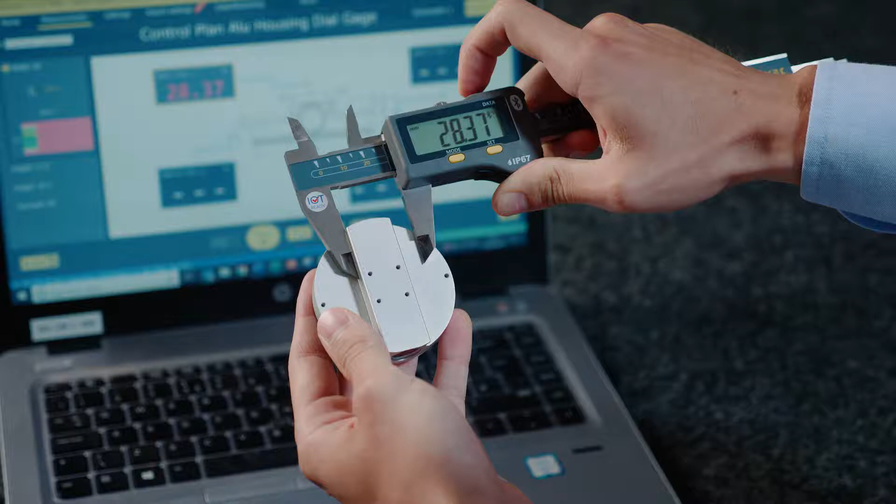Today we're going to be focusing on Sylcom Pro. What is Sylcom Pro? It's a software package that allows simultaneous communication between various devices, including Sylvac hand tools, the Bowers ball mic, Trimos height gauges, and plenty more.

Using the software package negates the need for manual data input. This enables an increase in efficiency and reduces potential human error. The Sylcom package also indicates to the operator very quickly if a component feature is in or out of tolerance. The values can be reported and saved within the software, or externally if you're using a separate SPC system. Let's take a closer look at the software.

Once you've started up the software, the first screen that appears is the login, and we can have various different levels of login. I've just got the supervisor here, but you could have the name of the operator, which would appear on the report. Down at the bottom here, I've got a little green indicator telling me that some of the instruments are already connected, because of some of the settings I've already applied. I'm just going to put in the login. It's worth mentioning that with the login there'd be different levels of access to changing settings, dependent on who's using the system, and these can all be fine-tuned.

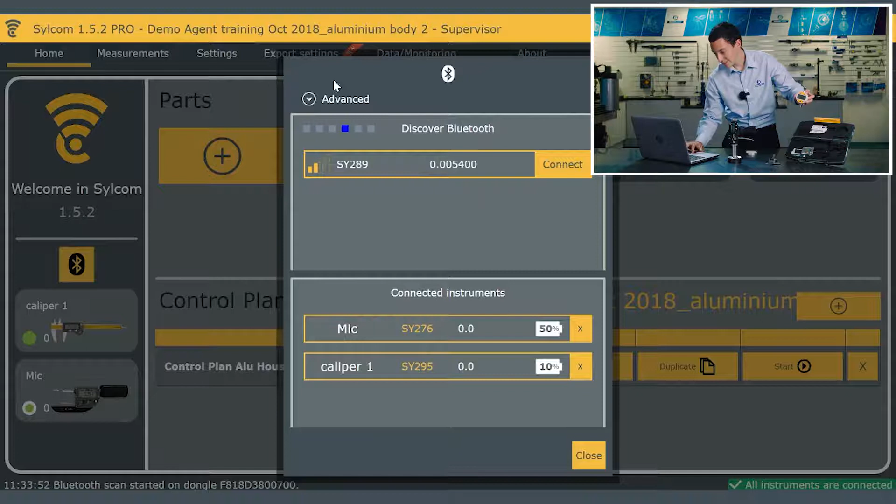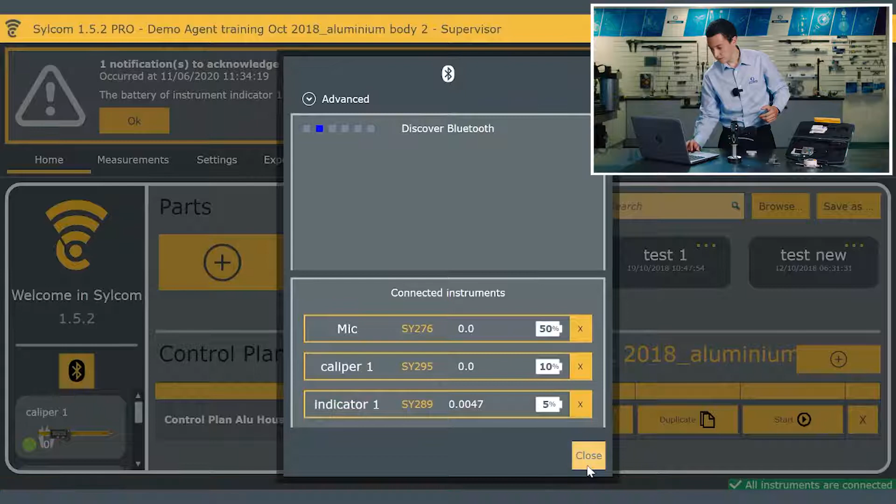We can connect up to eight instruments using the Bluetooth dongle, but if I had requirements to connect more, that's not a problem. We can add another Bluetooth dongle, and connect a total of 120 instruments if required. Now that that's connected, we can see an indicator at the top telling me I need to change the batteries on this. That's another feature of the software - it'll also indicate if the calibration date's running out, and I can get warnings and alerts linked to that.

So we've got a range of hand tools connected there. On the main screen we have some parts - you see I've been doing some tests, but you'd have a different part there, and the operator will be able to select and link to that part. Depending on where you are within the process, you may have a number of control plans. I've got a control plan here for the aluminium housing,

which is actually just the back of the indicator, you can see here. Just to keep things simple, I'm going to be using the caliper, but in reality I could be using a height gauge, an indicator, or the ball mic - it's not a problem connecting different instruments.

So if we just click start, I can pick up the caliper. I've got the component here. The first thing to point out is the part serial number. I can put in a part serial number, which will obviously be unique to the component, or if I don't fill that in, I can leave it, and that field will automatically be populated with the date and time.

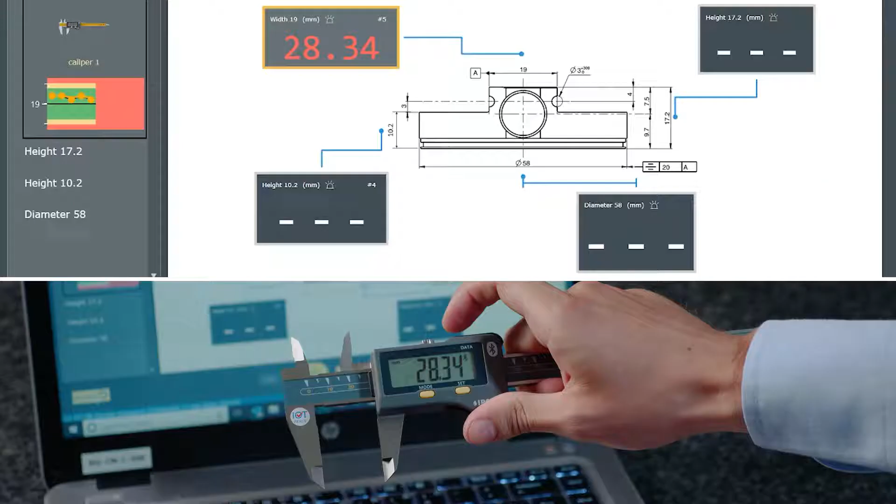We can see that the measurement we want to take is the width at 19mm, but it's also telling me what instrument to use. So if I did have various instruments, a picture would appear there, just helping the operator out. We've got a live view of the result changing as I'm measuring, so I'm just going to go and take that measurement. We can see as I've clicked the trigger, the screen has gone green - we're in tolerance and that value has been stored.

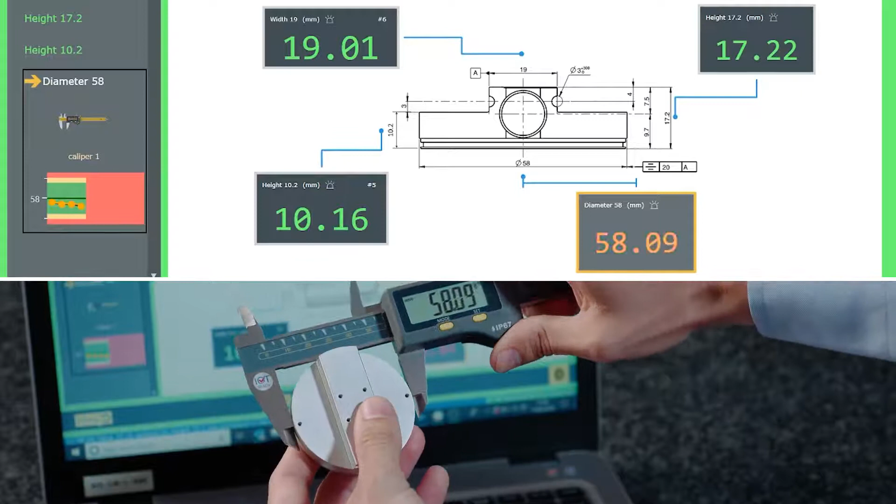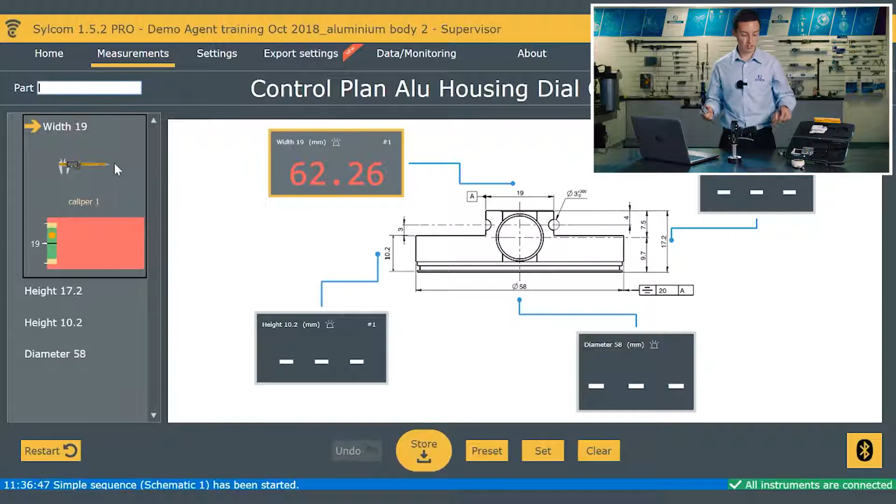And just work my way around now. So we've measured that component. Automatically the screen can detect that and has restarted the program for that. So I may pick up another component now, I can put in the unique serial number again and then work my way through this.

But you can see that now we've gone through one flow of results, on the screen there, just under the caliper, we've got an actual review of the data. That's going to tell me, and it will continue to populate as we go through, so that can give the operator an idea of trends in relation to a tolerance band.

So I'm just going to quickly take a few more so we've got a bit of data to work with. And 58. Yeah. So we've got some information there.

And I'm just going to put in a wrong result now, just to show you what happens. You can see the trends there appearing by the control limits. But if I put in a wrong result now, you can see the screen's gone red. This whole screen would go red actually if it was the second or third result and the other two were okay, so it's giving me an immediate indicator that something's not right there.

If I wanted to go back and undo, because I may have accidentally clicked the button, I can just click undo there and remove the previous result, and then we can start again. I can also restart measuring that component if I picked up the wrong one or something like that.

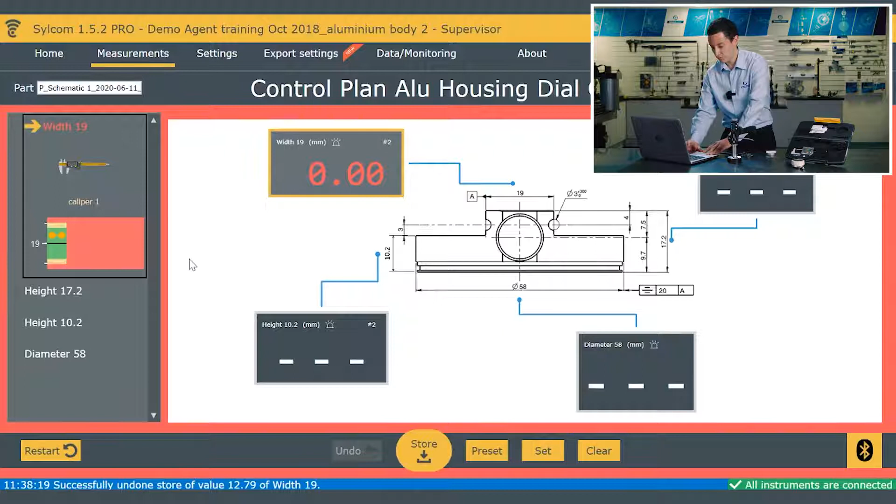So in terms of actually creating a program and a control plan, I'm just going to show you briefly how easy that is before we then move on to the results.

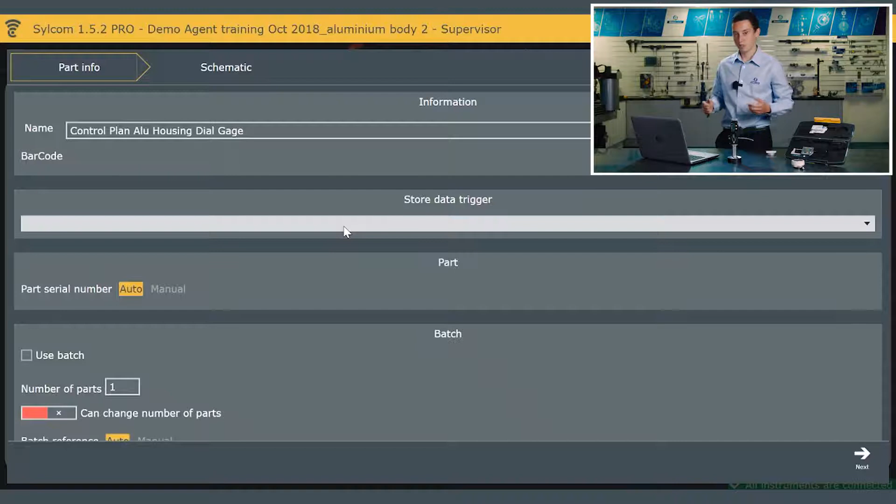So if I go into edit, we've named it, I've got a name there for it. Store data trigger is irrelevant. I've got the trigger on the top here, but I can actually have a foot pedal, Bluetooth foot pedal, or a key on the keyboard to signify that.

We can change the batch number, which I've just left as automatic. So depending on the number of parts you're doing within a batch, you could ask the program to actually stop.

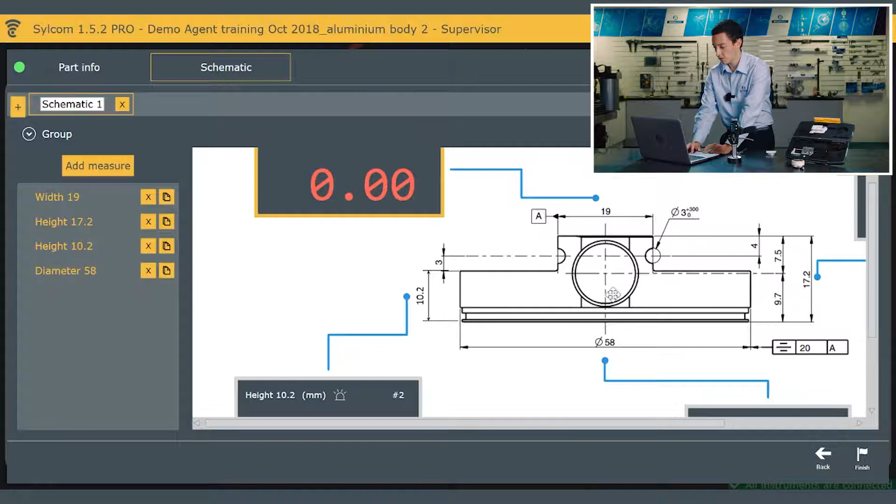And then within the actual control plan, all I've done is input a PDF of the technical drawing with some of the measurements I wanted to take a closer look at, and I can literally move that around very easily like that. I've added the measurements in.

I can fine-tune exactly where I want to place these, and then we can also very easily just change the size of the results and readings just like that.

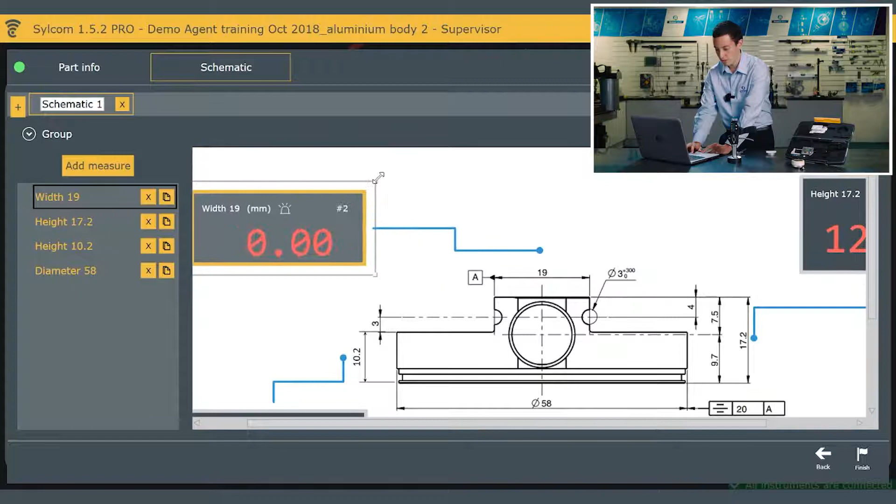And if I go into one of them, I can rename it, I can change the display type, we can change the nominal upper or lower tolerance, and just really fine-tune whatever works best depending on your application.

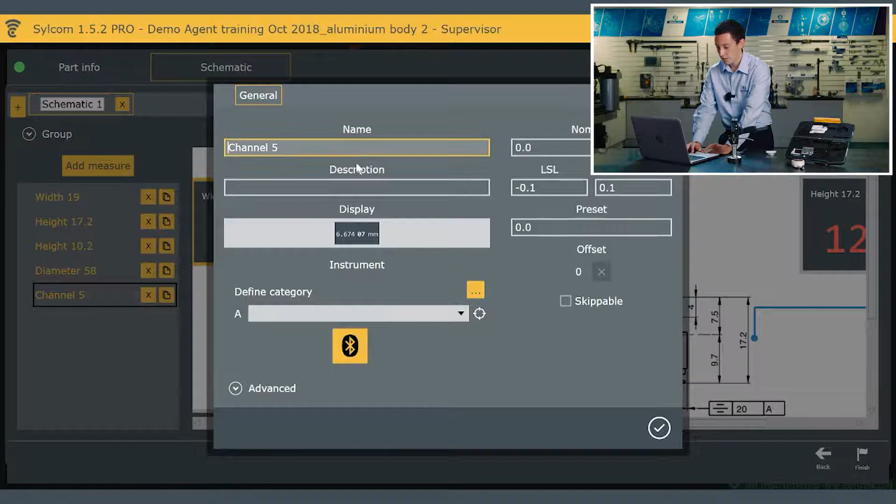If I want to add another measure, I can just click add, rename that, select the hand tool. So at the moment I've got these four connected, so I could have the mic checking something else, and just add that very easily and pop that where I want, and also the actual field that it's going to be checking.

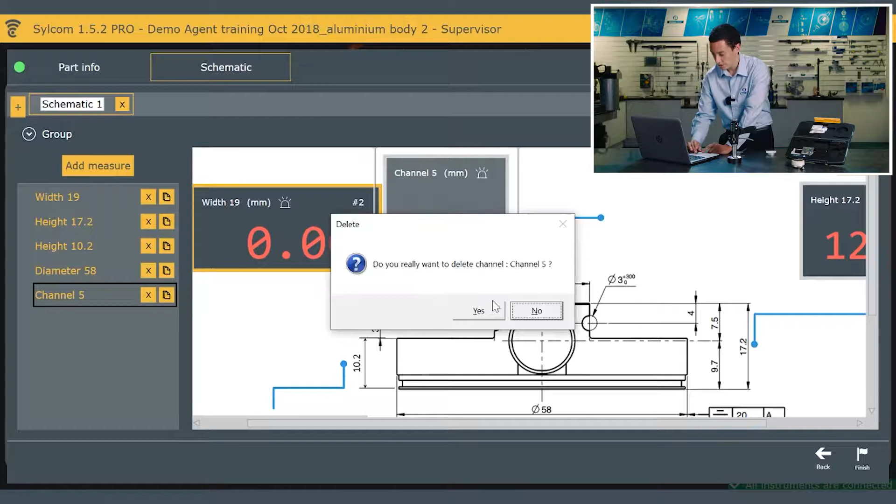And if I want to delete something, it's just a case of clicking the delete button. So I'll just pop that back in the middle. So yeah, you can see that you could quite quickly create a control plan with various different hand tools all linking into one component.

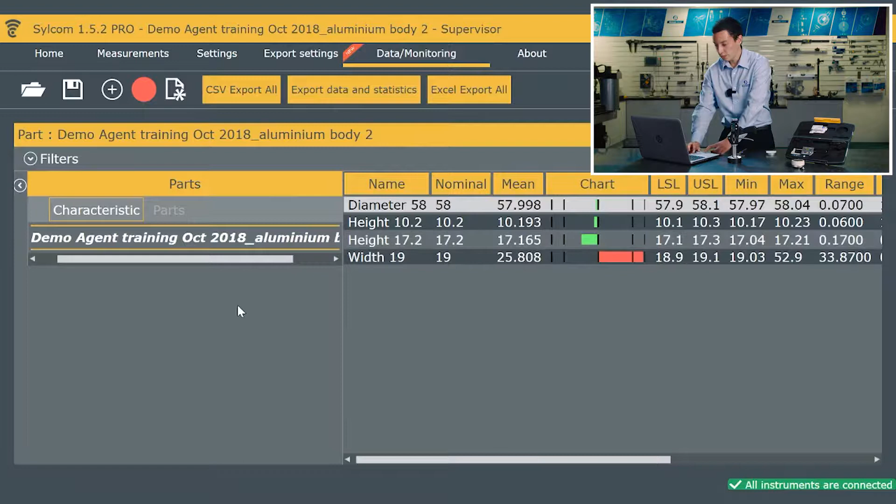So you're probably wondering where all that data is going. Within the Sylcom package, we have some analysis software. So these are the different, over here we have a summary of the results, and if I just open up the filters, I've actually got it set just to review the last 8 results.

So we've got a mean of those, the nominal value that was measured, the name, the tolerance band, min-max, range, CP, CPK value, and your various SPC analysis. So this is all within the software package.

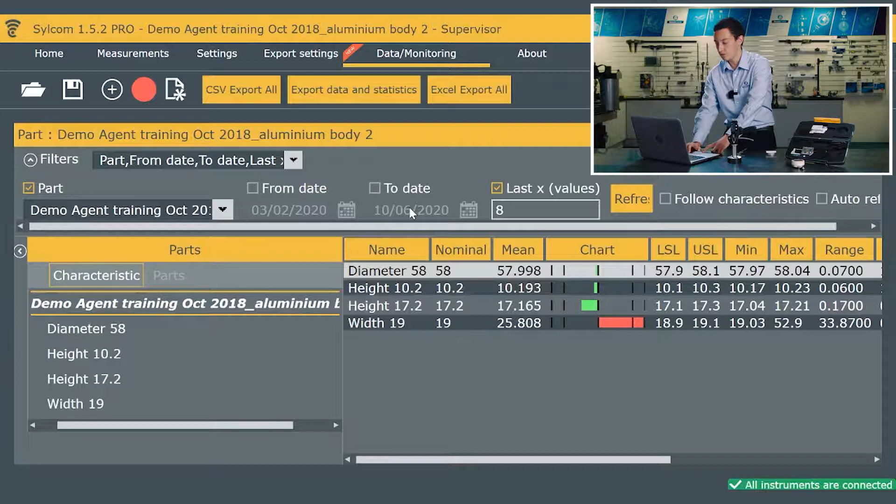If I was looking for data of a certain period, I can then change the from and to date. And for the individual feature, I can double click on the diameter and I can actually get a curve, a sigma curve. I can identify using the control limits where the results were, and also just a basic go no-go, what was in and out of tolerance if you just wanted a basic view.

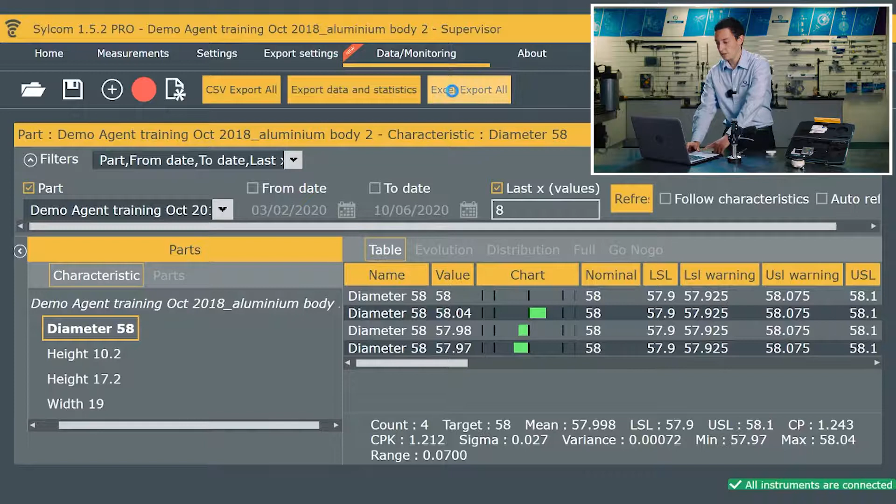And then these are the individual results in a table. There's lots of information here. You may not need it all, but we can pick and choose what information is saved and then where it's saved as well. So if I wanted to export it via Excel, we can just click export all.

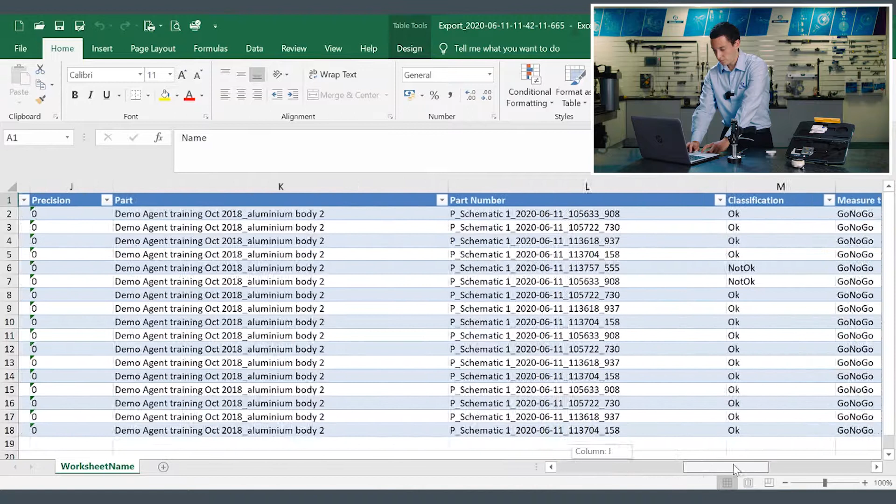We can save that, that will open up Excel. It's the one from today. So we've got all the information here, and we can delete columns and things and change things depending on what you actually need.

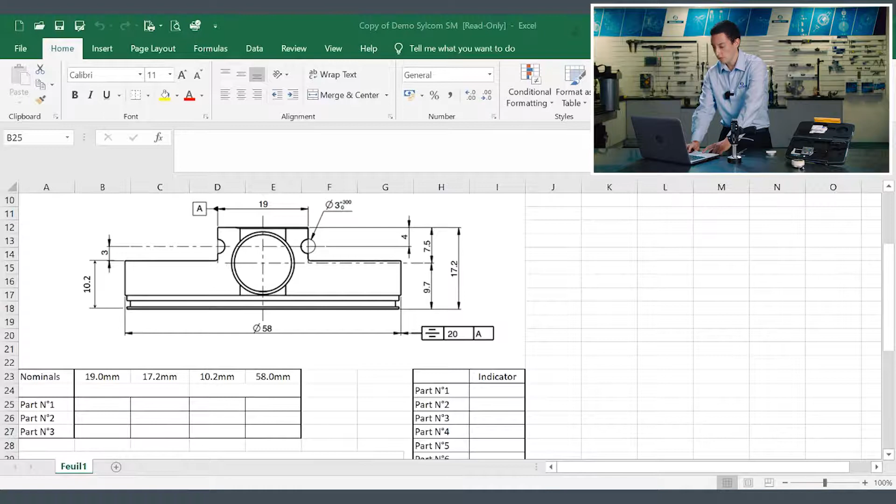You can get it to live export, so we could have live data going into an Excel template, which is what I've got here, or we could get it going into another SPC package via a CSV file or something like that.